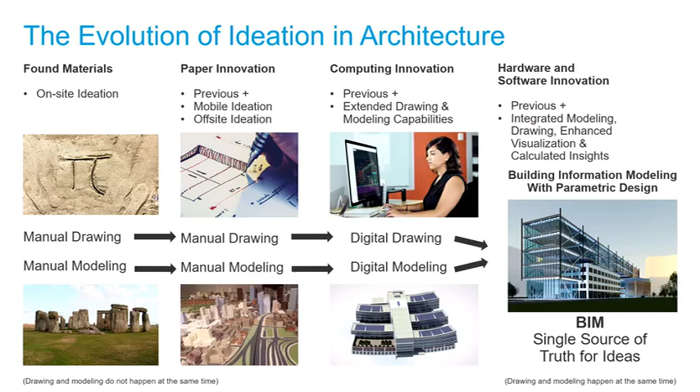So beyond BIM, we want to think about this next generation of ideation evolution. You're probably picking this up as you go through your classes. I'm assuming somebody's seen Unity in the quad already, and maybe somebody's been able to test Reflect in the architecture quad. Maybe somebody's tried to design a doghouse with Revit and put it through Unity. That's one of the cool projects we've set up for you, so definitely check that out.

Other cool things going on are with project delivery, so BIM 360, right? This is all enabled by big cloud computing innovations. How many of you are using BIM 360 Design for project delivery? That's quite a few, that's great.

So that's our one next evolution based on this cloud innovation. Then we have hardware and software innovation, where we get into computational and generative design, able to automate processes and generate options.

And then finally, one thing I really like to think about lately: beyond these two things, what impact is artificial intelligence going to have on the future of design? I think in the future we're going to see artificial intelligence able to crawl through project databases, assuming we've been able to identify data properly so it can find patterns in databases.

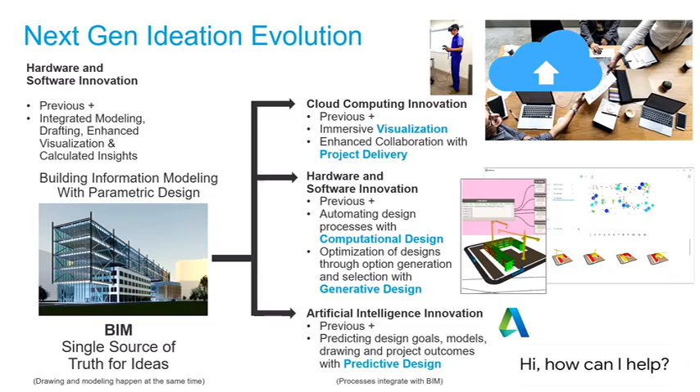So you start laying out a building and maybe the AI tells you, hey, I think the best location for your fire escape is here, based on analysis I've run on your last 15 projects. So the future of AI is going to sound a lot like predictive design. That's an emerging term to keep in mind as we develop our architectural projects. The focus of this course is going to be on computational and generative design, but with a focus on what this means for business and why it matters for business.

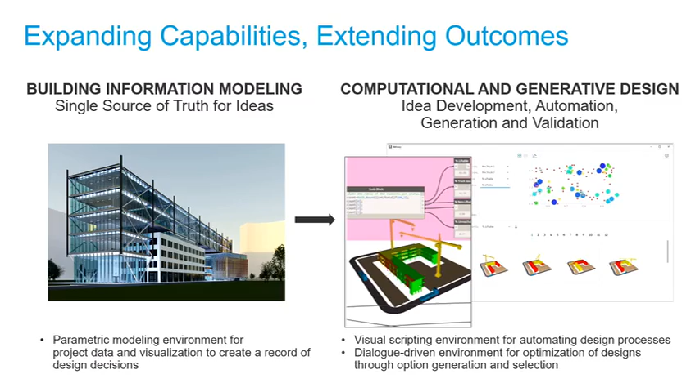So just to give you a product view of these things I've been talking about, in case somebody here has never worked in Revit. Revit is our BIM tool, and in this workflow we're using Revit to create geometry and assign constraints, modify parameters, and document our ideas. It's a pretty straightforward process.

What's really interesting about Revit and some recent developments in the product is we have things like global parameters, which allow you to create a very flexible modeling system within Revit. So you can have high degrees of flexibility throughout your project lifecycle, which is quite nice.

We also have computational design. This looks a little different than our traditional BIM process because we're actually starting out maybe in Revit with a site or some location, generating geometry within Dynamo, which is kind of like an extension for Revit, and then integrating that geometry back into the BIM model.

So for those of you who are in Revit and working, don't worry—computational design is okay, and it's not going to push anyone out of any process by any means. It's very much an integrated way of working, and it's going to give you more time to work on other things.

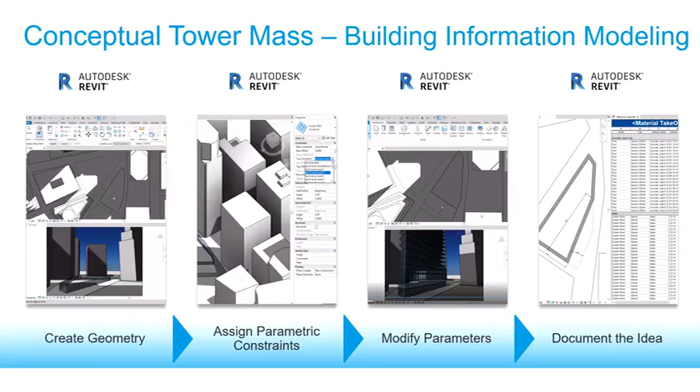Generative design is kind of interesting—we're automating the creation of the model, form, and drawing. But on top of that, we're also able to generate options, and really an insane amount of options. You can basically generate as many options as your computing processing power can handle, and that's quite a few. You can do more with generative design than you could ever do manually previously.

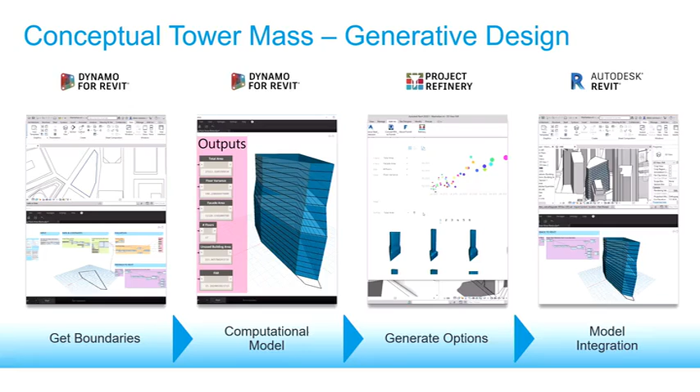So why is this important? We're going to switch a little bit into a business mindset right now. So the architects in the room, forgive me, I did make nice visuals—hopefully this keeps you entertained.

You'll start out with your first big charrette with your team, then go have your review with your client, and the client will say I like that, I don't like that, let's get a consultant on board—and the engineer will say, hey, I don't know about this system, let's try this thing. It's kind of an all-over-the-place process, and you're getting a lot of the constraints downstream, which isn't really ideal for business efficiency. Just throwing that out there.

Then at the end of this limited charretting process, we're focused on just realizing a building—getting the construction documentation set out there, handing it off, making sure the contractor is building things properly, closing it out, doing the as-builts. Maybe we're doing a little bit of field management, but we're kind of hands-off at that point.

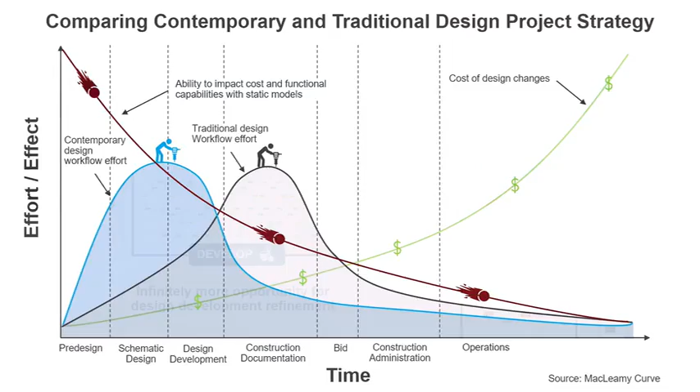Beyond realizing the building, when you start implementing these tools, new opportunities open up because you'll have more time away from repetitive and tedious tasks to focus on other things. You'll be able to curate building operations throughout the building life cycle, inform future projects, and grow the work you do related to the typologies you're currently working on.

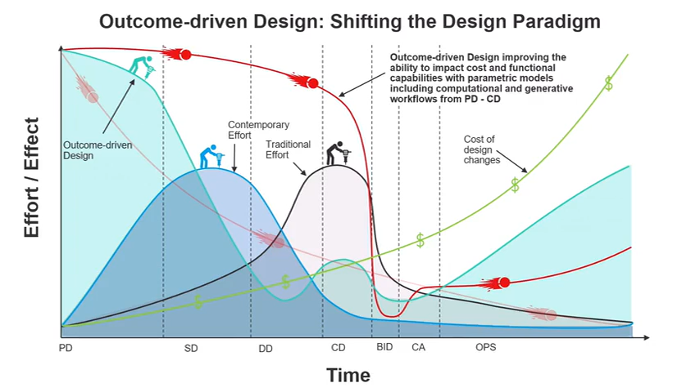I also think in that operations phase, you can see that green line - there's a bigger opportunity for expanding into nurturing a relationship with the customer. And you can see to the left where there's this outcome-driven design piece working up there - the place where we'll be putting in the most work in the future is way up front, having to do a lot with getting the data we need to create buildings from a very lateral and democratic approach.

So you can see there are opportunities once we start shifting our major work effort to the front part of our projects - for better visualization, material studies, sustainability studies, and research and detailing. I think these are areas that will expand and maybe won't be quite so automated. Surely we can develop databases, but I think to make really great decisions for sustainability, you really need people involved there.

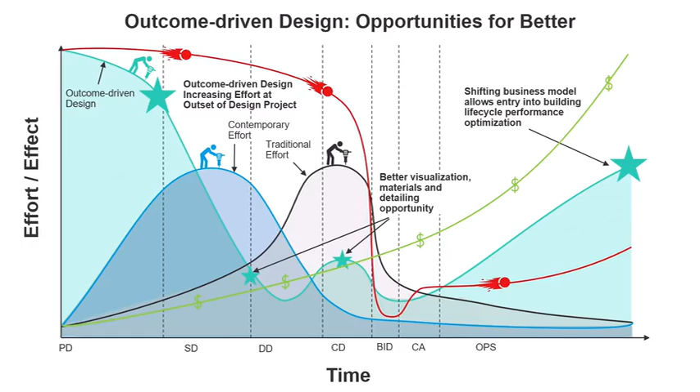And then I want to talk a little bit about key components of outcome-driven design. So who has ever been locked in a room for a week at an offsite doing strategic planning?

I'm seeing a minimal amount of hands go up for that, and that's really interesting and really good. Because people are asking, what is the future of the architecture profession? Especially with automation and computation and generating happening. If I'm not clicking and making walls and making masses, what am I going to be doing in the future? I think that the future holds great things for all of you.

I think that in the future, strategic planning is going to be so important to our design processes. And I also think when you have the full team brought in for strategic planning up front, you're going to have very, very different outcomes than what you have today.

A typical process today is you'll have a principal meeting with a client, they'll figure out kind of what the project looks like, maybe a project architect will come in, maybe a project manager will come in and think about what's happening. Then that information might get disseminated to the very small design team that starts to think about the project. Then maybe some consultants are brought in. Then maybe at the end things start going to the contractor and to the construction field.

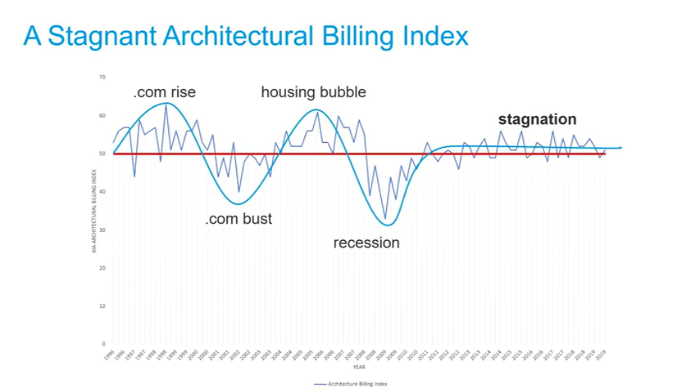On top of this, anyone in the industry right now is aware that our billing index is a little waffly and a little stagnant. We've had some woes recently in August where the billing index is dipping, and this isn't good for our bottom line. The other thing to keep in the back of your head as you think about your value: in the big picture, we are this tiny fraction of the overall cost of a project. It would mean actually so little in the full cost of the project to value us properly.

We also have this kind of crazy compensation system we're working in, where the majority of projects are lump sum fixed fee projects, and it's very difficult to negotiate up in those project types. Beyond that, if you're not doing a lump sum fixed fee project, you have time-basis projects, which if you mention to anybody—hey, how's it working hourly?—you'll probably get a fiery response saying it's rough, I don't enjoy it, it's not my favorite thing.

The other thing that's pretty interesting is with the majority of our buildings being designed in this lump sum system, there's really not a lot of incentive for people to work—our incentive is actually to spend less time and less effort on things. And for the client, they don't generally care about the process. Why would they? They just want it done for that amount of money they're paying, right?

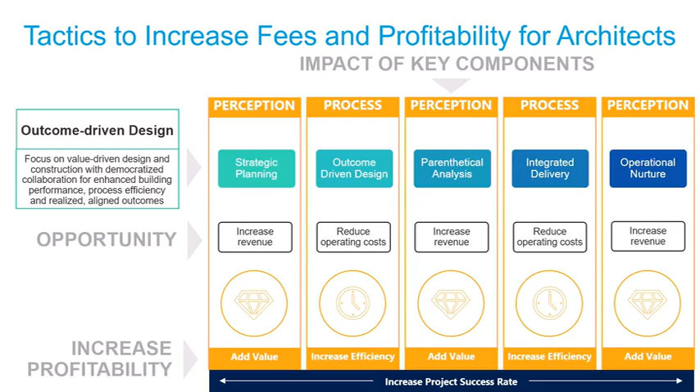And how do we do this? We're going to have to be focusing on a series of new hires. So the future of business hires is going to be a little bit like design strategist, design technologist. Who here is a design technologist? One, two, three, four, five, six.

So when I was working in the architecture industry about 7 years ago, I went in for a job and they wanted to call me a software specialist, like for architecture. I was like, hey, what if we think about this a little bit differently? I think I can add a little bit more value than that. What if we call it a design technologist? The firm had never heard of that word before, but we went with it, and that was my title. I was probably one of the earlier design technologists out there in the industry doing design technology, thinking about things more holistically.

The future is integrated design technology teams in your firms and projects. You're also going to have a design analyst. Who has a design analyst that they work with currently? Not a hand in the room. Oh my God, that's remarkable. Think about it, it doesn't quite exist yet, but it should. Because there should be a person thinking about the entire outcome, metrics, and value of that design holistically as you're designing it, making sure you're staying on track and telling your design technology and architecture teams, hey, we've got to make these changes here, there, and there because we're not quite hitting the marks. Think about the fact that that doesn't exist. It's kind of wild.

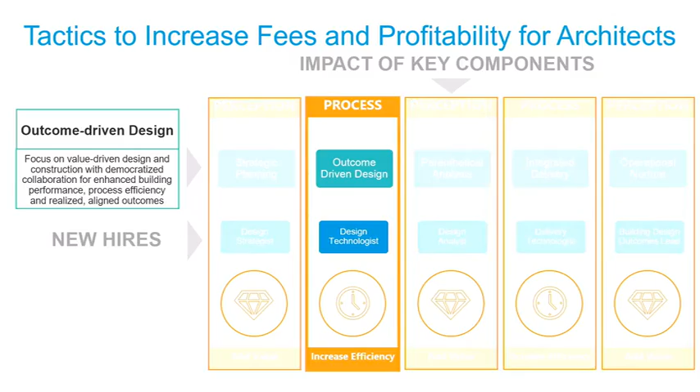So let's talk a little bit about this design technology team. When I worked in my team, it was part of a CIO, CTO, part of the organization. We didn't have all these people, we had two of these people. We had the design technologist and we had a BIM manager. Actually, it was mostly two people performing those two roles.

Bringing computational and generative design into your business is going to open up new opportunities for new roles. You're going to see a dedicated design technologist that should be more of a generalist, looking at things holistically, all the technologies coming in, and getting a sense of what does what and why should we do something here, there, or the other thing. You'll have the BIM manager who's thinking more about Revit and everything going on in that landscape as far as standards and ensuring they're rolled out across the company properly. Computational designer is going to be very focused on process automation, making sure those scripts and graphs are able to be democratized across the firm. And your generative designer is going to be the person that thinks about where we can actually automate options for the things we're working on.

So if you have a company that doesn't have these four people and you're at an executive level, you need to be thinking ahead about how you can hire these people so that you're at the beginning of this wave into outcome-driven design. What these people should be doing is looking at the full scope of work for building design and all the different capabilities listed underneath, and thinking where can I find places and opportunities for efficiency in all of these different landscapes.

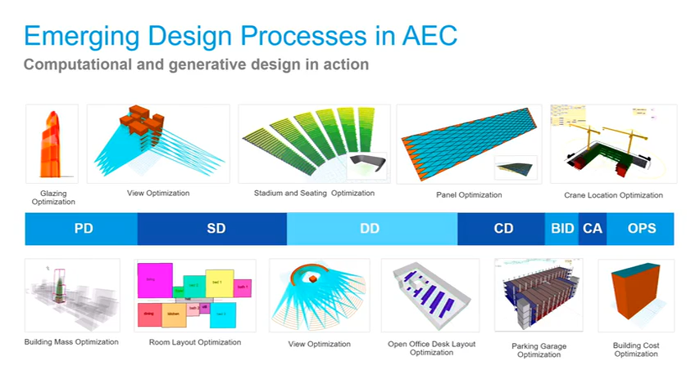So some places we've actually already seen are view optimization and space planning, panel optimization, crane location optimization. There's a lot of work already being done in the industry across these phases to get things automated and optimized. Let's talk a little bit about computational design.

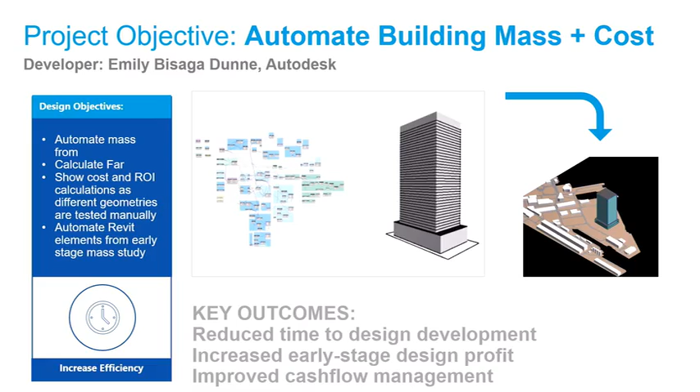These are words that, as architects, it's not necessarily what we're thinking about when we are working on the little picks and clicks to make a building, but it's very important to show your value.

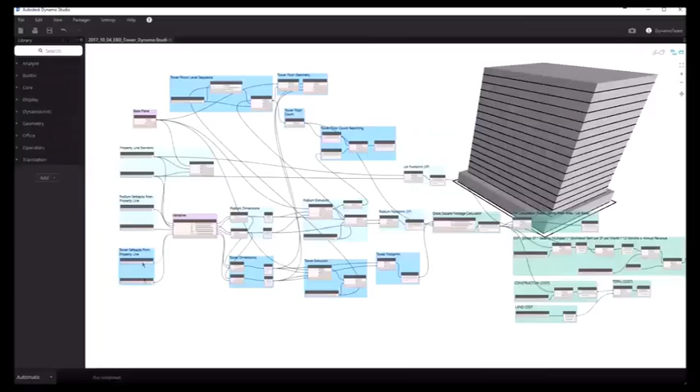This is Dynamo, for someone who hasn't seen the Dynamo user interface. There are these things called nodes which are wired together, and as they're wired together, you're able to do things like create geometric volumes, flex them. As you're flexing these things live, there are cost variables and parameters that can be built into your graph that can give you any kind of analysis you could possibly develop.

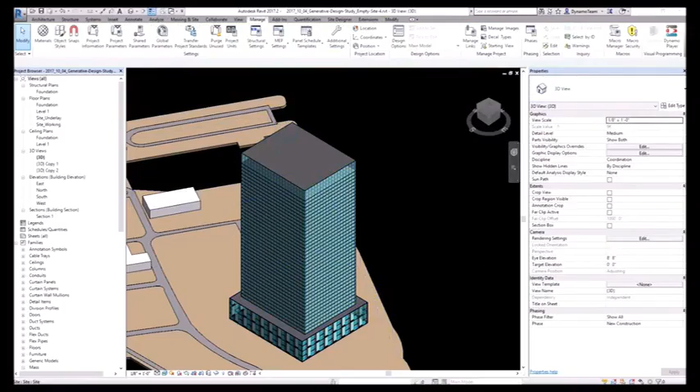One thing that's really funny about computational and generative design is people ask, well, what can I do with it? And it's really anything. So it's kind of hard for people to get into it because it's just so wide open. Any problem that you can break down into a series of requirements and then work through in this Dynamo system, you can solve with it.

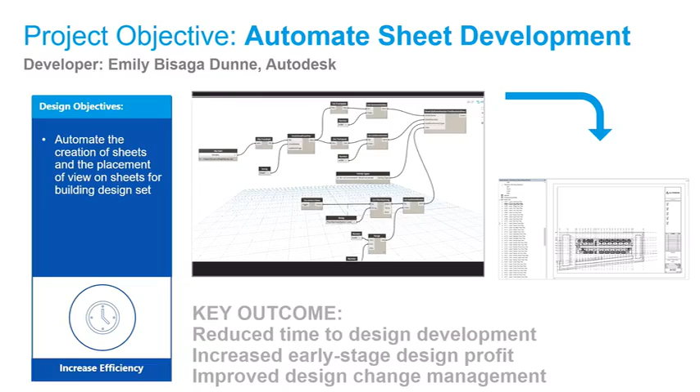One automation that's really effective is automating sheets. I'm sure some of you have had to lay out views on sheets before, and it takes a really long time. Usually there's a cartoon set up front, then you're maybe doing some data in Excel to get an idea of that cartoon set, and then you're probably manually entering things inside your Revit application. But with Dynamo, you can take 39 views in your project browser and immediately create all of the sheets necessary for your project and place views.

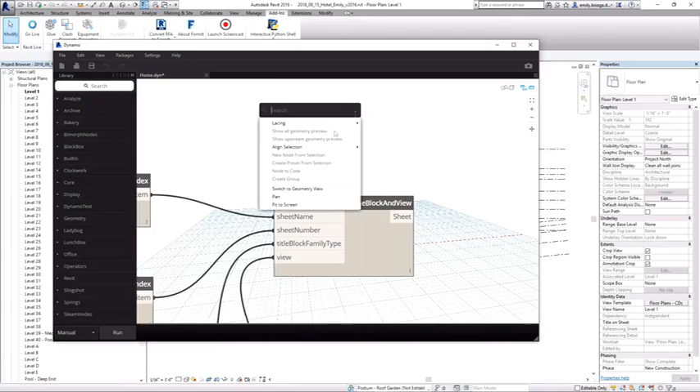And we're even getting to a point where people now are using bin packing algorithms to be able to lay out multiple views in really cool ways within the box perimeter of the sheet. So there's just a lot of technological development going into these processes.

This is super cool. Does anyone in here know Jacob Small? No? One, two? Gosh, you guys, you've got to meet him. He's the best. He's going to be at the Dynamo Slam, and he and I are emceeing that event, tomorrow night I think at 6. So come downstairs and see us and meet him because he's amazing.

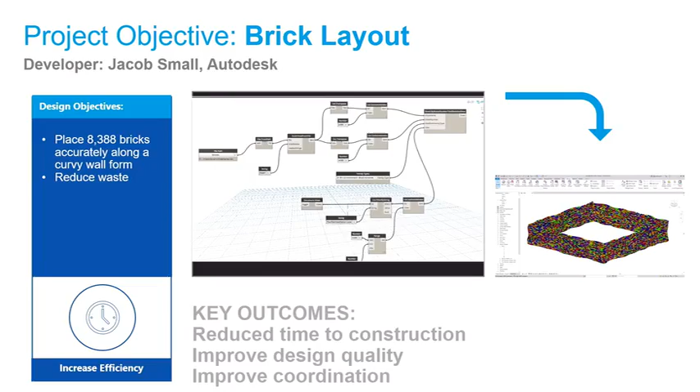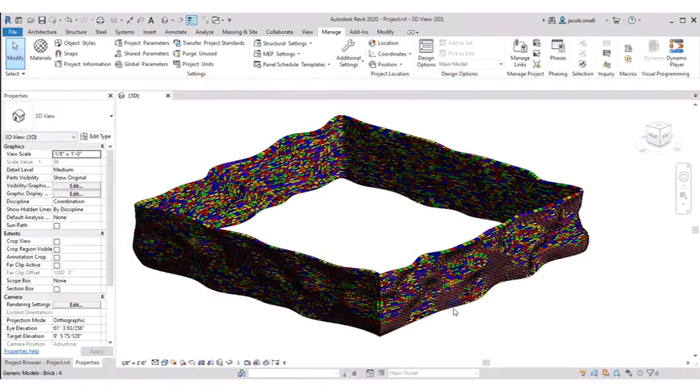He's made this graph where you're able to place 8,388 bricks on a curved wall. It's unbelievable. Who could possibly actually place those physically? I don't even think I could if I wanted to, once. And think of how long it would take, and how tedious it would be, and how many rotations you'd have to do. I get tired thinking about it.

So this is super cool, right? You have this curvy wall form, you're able to place these things, you're able to think about optimizing the location of control joint sequencing. You can make sure this is laid out properly or not ahead of time instead of waiting to see and talk to a builder. You can give them very accurate instructions and have a more integrated process.

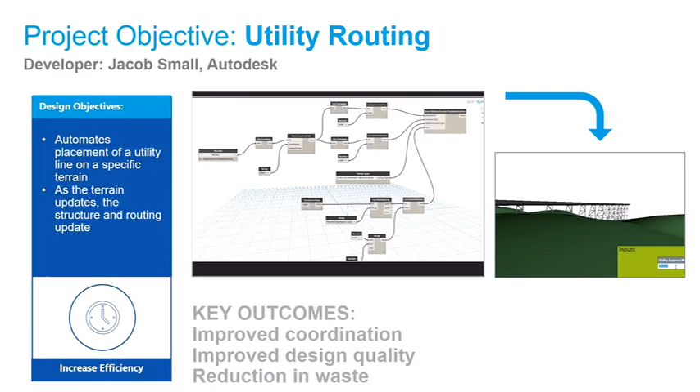So that's exciting. Utility routing, that's another really cool development that's come out lately. I don't know if anyone has ever automated utility routing? One person, okay, cool. So the idea is being able to take utilities—this is baked into Revit, and it can also be utilized in Civil 3D because now we're starting to get expanded Dynamo opportunities. As you're updating the terrain, it's going to update the structure that supports all of the utility lines and then informs the routing of the utility.

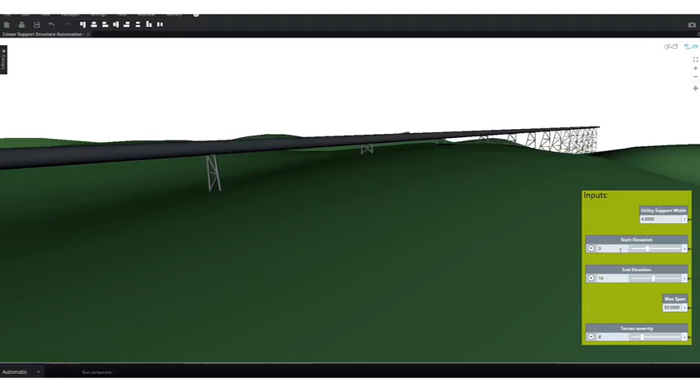It's also possible now to automate furniture placement. I don't know who's aware of this trend. What is the next big building trend for building design? What typology? No? Starts with M, rhymes with multifamily development. Multifamily development. So if you do multifamily development, that's awesome—things are looking good for you in the future.

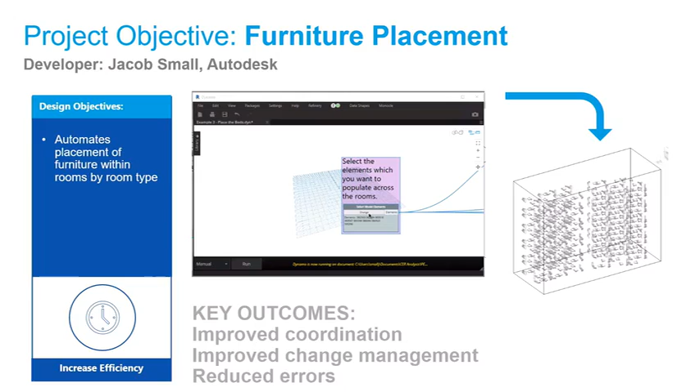You should really think about utilizing Dynamo to place all of your furniture and all of your unit layouts automatically. You can see in this instance, some room information is being entered into the Dynamo graph for where you're copying elements from, and then all of the furniture within that room is being placed in all different parts of the project.

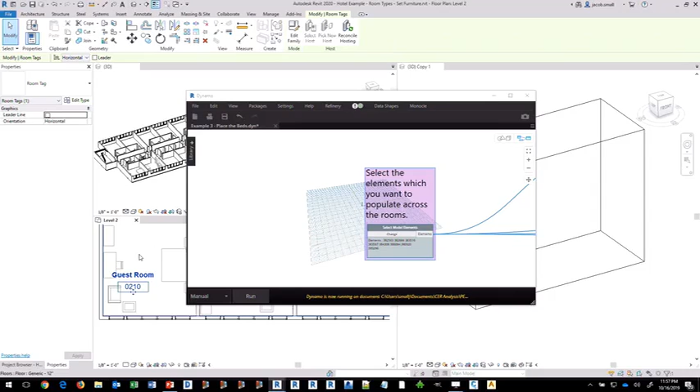On the right-hand side there's a 3D view, on the left-hand side there's also a 3D view. You'll see in a moment that when the graph is run and the furniture is selected, all of the furniture then gets automatically populated throughout all of the levels and into all of the similar room types of the building, which is pretty special and magical if you've ever had to lay them out one by one.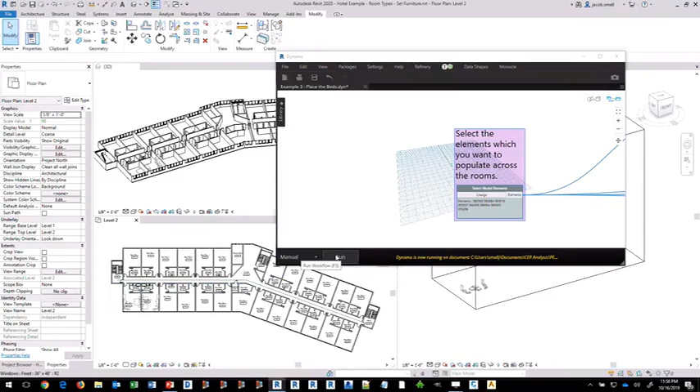We'll give this one second. It's running now, and there it is—all the furniture, it's there. Pretty cool.

And if you're more of the engineering type, we're doing a lot with the ability to automate the placement of steel and reduce waste for materials, which is really exciting. Again, it's a way that we're not only increasing efficiency, but also adding value by reducing waste.

So think about where you can do the play of both things together and market that.

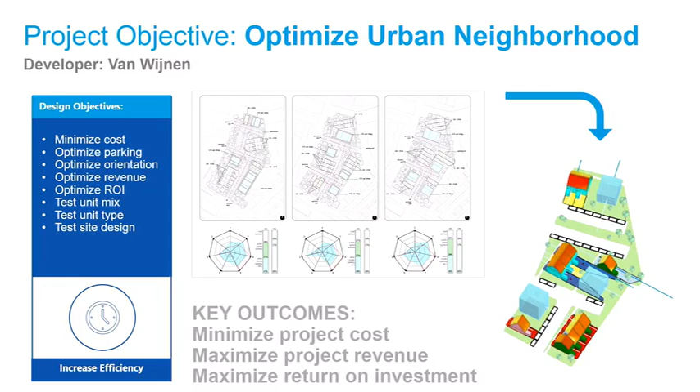I don't know if anyone has seen this Van Wijnen project. It's been trotted around quite a bit by Autodesk and our teams, but it's pretty cool. Van Wijnen is in the Netherlands, and they were having a lot of trouble sustaining a profit. They were going after like a 2% profit margin when designing these layouts for their urban neighborhoods, and struggling there. So you can see they developed all of these different parameters they wanted to optimize for, like backyard size, views, solar gain, cost, etc.

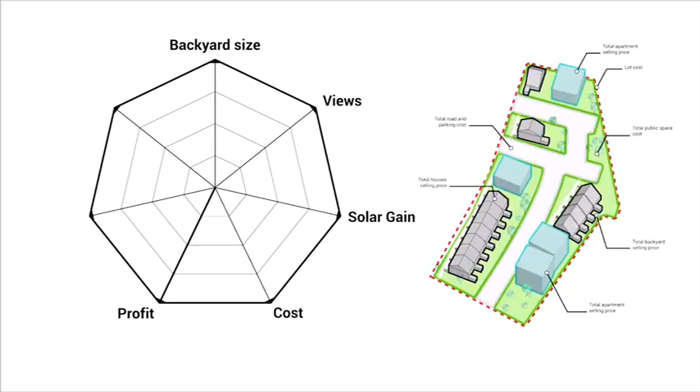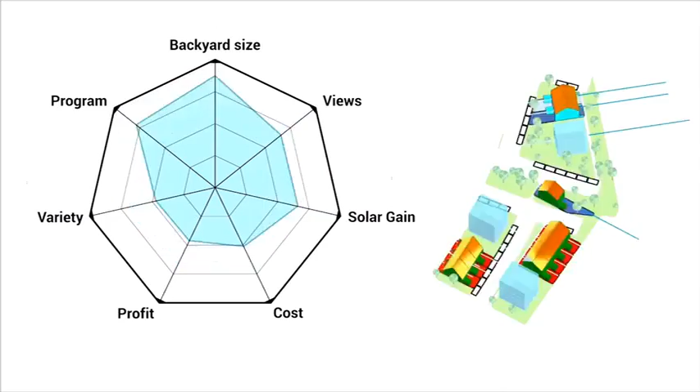And they were able to work out an algorithm that not only automates the creation of these things, but also optimizes for the values as they're working with one another. So that's one example of optimization.

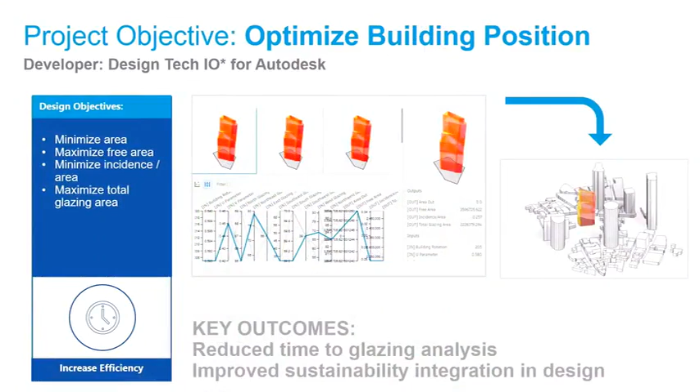We also have Design Tech IO. This is, again, a pretty good example of showing multi-objective optimization. This time we're trying to place buildings in the most efficient way on the site they're working with, optimizing a building position based on solar incidence and the glazing requirements of the building.

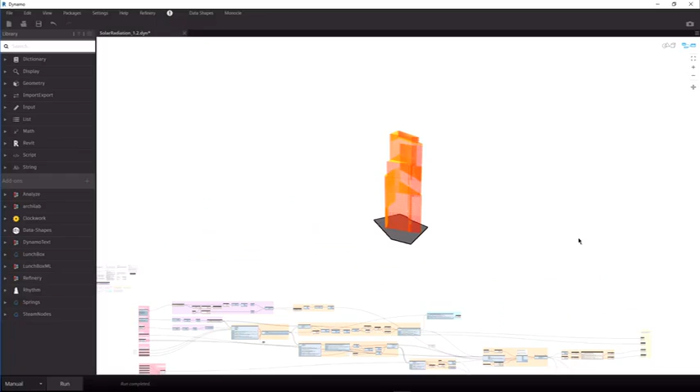So in this case, we're utilizing, again, Dynamo and Project Refinery. We're running these options within Refinery, and Refinery gives you the tools to narrow down to very specific requirements within this graph you're seeing, to identify the best possible option.

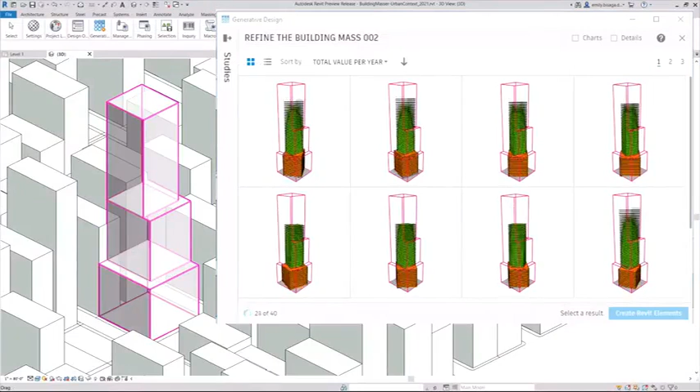We're also able to optimize the building program. This was actually a cool video you'll see on main stage, showing the idea of integrating generative design into the UI so that in the future people may not even need to get into Dynamo to run these things. Currently if you're running it, you're going from Dynamo to Project Refinery, but in the future, wouldn't it be great if, just like Dynamo Player, we had that accessibility for people where they're able to just run these studies without all of the back end.

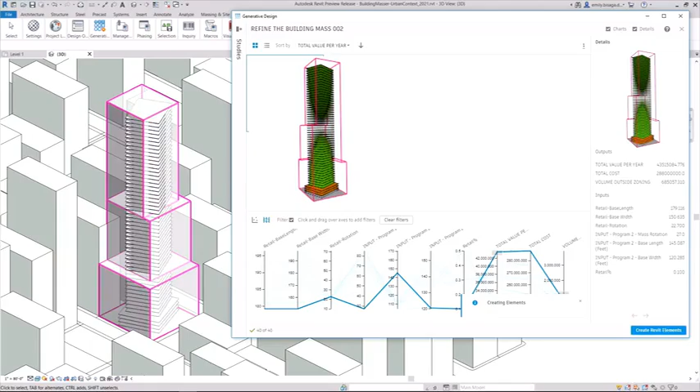And this again brings in the importance of that design technology team. You need a strong team that's going to help you on the back end and make it accessible on the front end. This is a project everybody's probably seen 1,000 times.

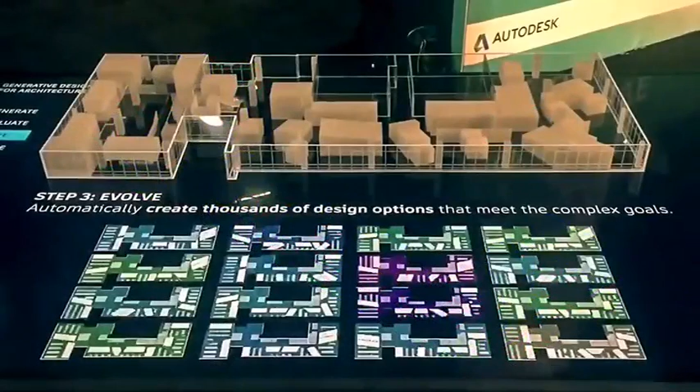The MaRS office in Toronto, Autodesk's the Living team designed this. And I think why I put this in here isn't because I want to show it to you for the 10,000th time, but what I want to convey is, about 4 years ago, I was at AU, and I was a design technologist in an architecture firm, and I walked up to this exhibit, and I saw all these little boxes moving, and I was like, what is this? And it's just taken me on this incredible, crazy journey into Autodesk as a premium support specialist, specializing in generative design and BIM, and as an architecture technical evangelist, getting in deep with the product teams and getting their information out to you, and also now in this industry outcomes role. This stuff is life-changing. It really is, and it should really impact everything about how you design buildings.

So I'm going to skip through some other things here because I want to be able to look at the parking layout. It's pretty cool. Dieter Vermeulen, I don't know if you all know Dieter Vermeulen.

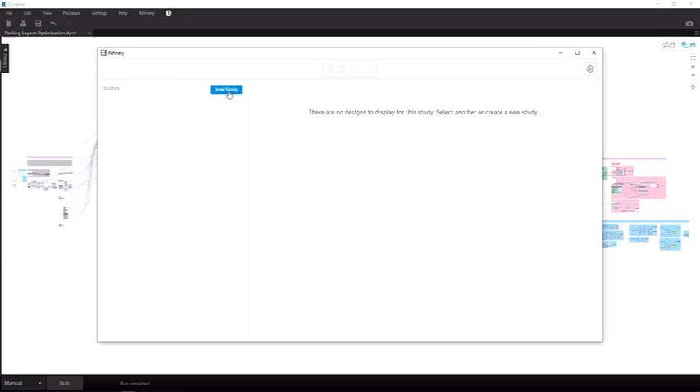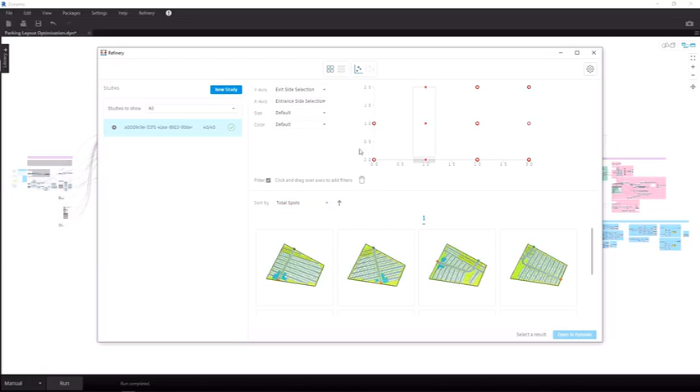He's a really, really talented computational designer. He's figured out a way recently to automate parking layouts. If anybody's worked in a retail area, maybe on something like a Walmart or Costco, in the early stage real estate development portion of the project, they're going to ask you to lay out a parking lot every single time you work on one of these buildings. And these buildings pop up pretty frequently for these big box companies. This kind of graph would let you go in, select the big picture form, and completely automate the parking space layouts. Think about all the different parts of your design process that this can touch.

Moving into the last part of this talk that I want to convey to you all: outcomes really matter. They really matter. They matter for your bottom line. They matter for the paycheck that you take home. They matter for the future of our planet. We need to build better buildings, desperately.

I think the message I want you to take away from this talk is to think about this strategy. Think about the roles that you've never heard of today, and think about what your future could look like considering all of this. Do I want to think a little more about design data analytics and visualization? Should I think more about strategic planning? Or should I think more about customer success? And how can I integrate those future possibilities into my current role?

If you're at an executive level, I think where you want to start in redefining your project strategy is reviewing your project typologies, reviewing your staff, your processes, and training up. We need to consider training up for strategic planning, for coding, for data analysis, maybe integrating manufacturing understanding into the architectural process, and customer success. These are all new arenas that we are moving into as architects so that we can add value and be relevant.

As far as testing, this is one of the important parts of computational and generative design for a business person. You've got to find the right project, the right client, and the right teams all at the right time, which is tough. You need a client who's going to care enough to be flexible, show up, come to planning meetings, and give you the data you need up front to make the best possible building for them.

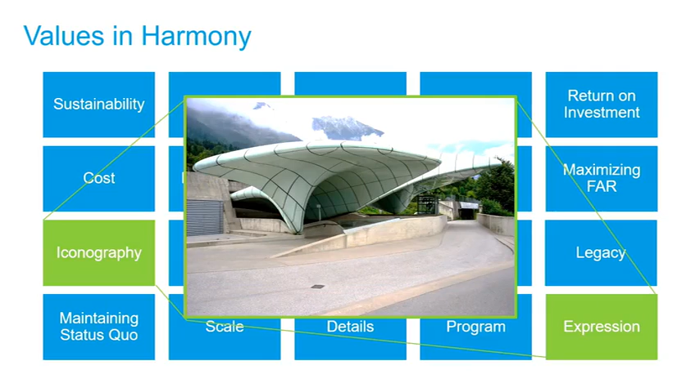Someone might really care about sustainability, or somebody might really care about expression, or maybe maximizing FAR, or maybe it's combinations of these things, right? Maybe the whole project's about iconography and expression, and it's definitely not about maxing the FAR, you know?

So there's a people problem in all of this to think about. You have to be able to manage people and values earlier in the design and get them clarified.

Finally, the interesting thing is when you get those values, it does turn into metrics, and it does turn into elements within your design, and it does really impact the entire design process. So I know I sound crazy when I'm like, what are your values? But it's important, and it's important to be able to have that conversation.

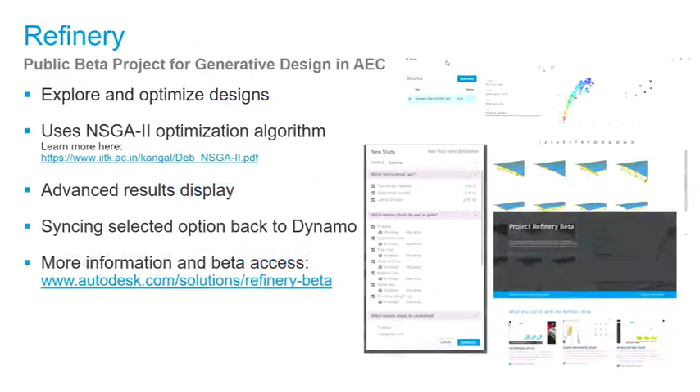Values becoming goals for your project, this is what that looks like. And skipping ahead a little bit, because I think, what do we have, 5 minutes left? Is that right? Good. I want to just give you some resources, think about Dynamo in the future.

And Dynamo is cool, it's expanding rapidly, and it's being supported in all of these different products. So Dynamo is flexible, it's going to help you have a more common data environment, and it's going to keep you on the cutting edge of design, process, and strategy.

Here's some additional resources. I'll send this out to email for anyone who showed up. And also, there's things like the Dynamo user groups across the world that I would highly recommend you just pop in and listen to what people are up to, because you'll get a really good sense of, in the computational design community, what are the trends, what are people automating, what are people optimizing, and where do I need to be? Where do I need to position my company to get the most out of the future of design?

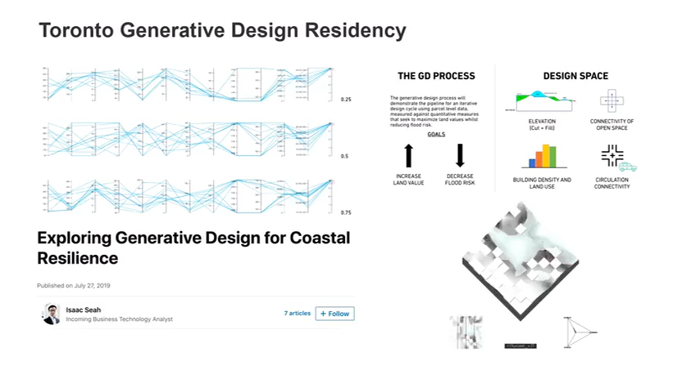We also have things like design residencies, which are kind of cool. So if you want to get into computational and generative design, you can actually go and do a residency and go through a hackathon and deeply embed yourself in the process to get a nicer understanding of that.

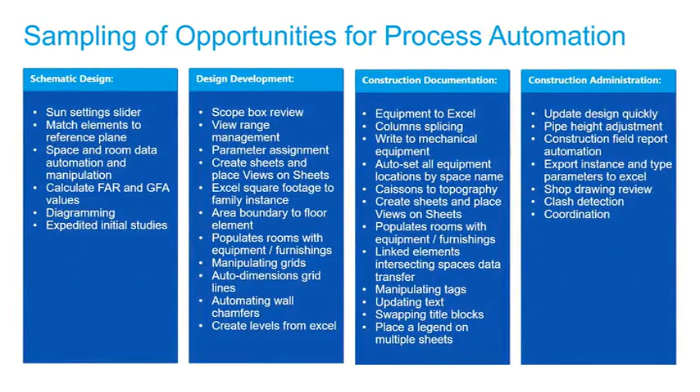At this point, I see that it's 1:11 p.m. There's so many things you can do with process automation. There's so many things that you can do with generative design. And I just want you to keep these things in mind, right? These are the conclusions you should take away from today.

Computational and generative design are influencing a whole new strategy for the industry. And the new strategy is called outcome-driven design. If you had to tell somebody at your firm what was one of the bigger things you took away from this entire experience, ask them if they've heard about outcome-driven design, and ask them what they think it means. And that's going to be a really cool dialogue and discussion for us all to have as an industry in the future.

We also need to work on this process and perception issue. We've got to figure out designing efficiently, adding value, and showing how we're adding value. Beyond this, it's going to take a big shift in mindset for people to get on board with this, because there's that weird question of what are your values, right?

And then I think that for our profession, if we move in this direction, we can make a huge impact. So good luck out there. I believe in you. Okay. Thank you.